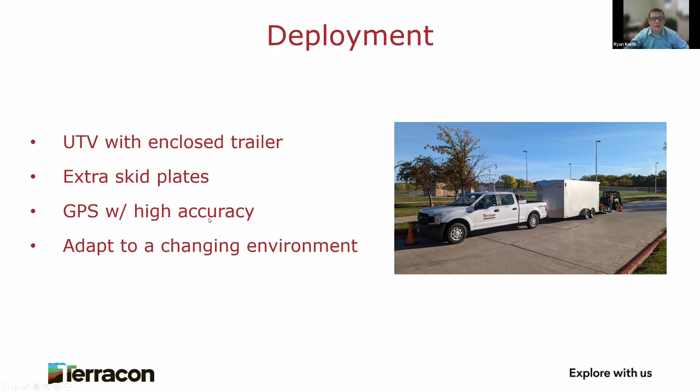And then I would say just adapting to a changing environment. People get tired of driving, people get tired of processing. So right now we have 3 of us that are processing data. This unit's essentially in use constantly, either with travel or collection. So we have a lot of data coming in and a lot of data that people want in short amounts of time. I'm going to go back to the previous one.

So we bought the standard cart that Kontur makes. We decided that this was the best option first, at least, before trying to custom make anything or mount it onto a little van. And we had some issues at first trying to get this thing going. But I would say Kontur's customer support is fantastic. We've spent hours on the phone with Paul just trying to figure out the best way to process the data.

We also had an issue with the GeoScope, which was quickly resolved. We even got a loaner in the meantime while it was getting fixed. So I will say that in general, geophysical equipment companies don't have this kind of customer support that we see with Kontur. We have a ton of gear, from seismographs, radars, electrical resistivity equipment, and getting those worked on when they break can be painful. Sometimes it's 6 months before we get the equipment back without really any communication on what's happening.

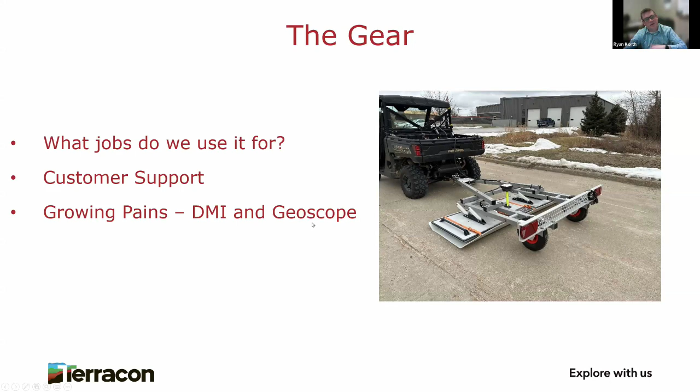So some projects that we've done with this: SUE, we recently did this one. We have a standard internal protocol where we require MC GPR on any SUE project as just the first step, right? Because you can get the big picture fast.

This site here, I think he was there maybe half a day with setup, collection, teardown, where it would take you at least a full day, probably 2, to collect with a standard radar. So we go out, we do this first, find all the utilities that we can, and then we send ground crews in to designate.

A lot of what we've been using the Kontur for is asphalt thickness, both private and public. A lot of them are just worried about thin spots, right? We have an old horn antenna that we used to use for this. It's clunky, it's old, it's hard to use. People don't like it. So we switched to doing Kontur.

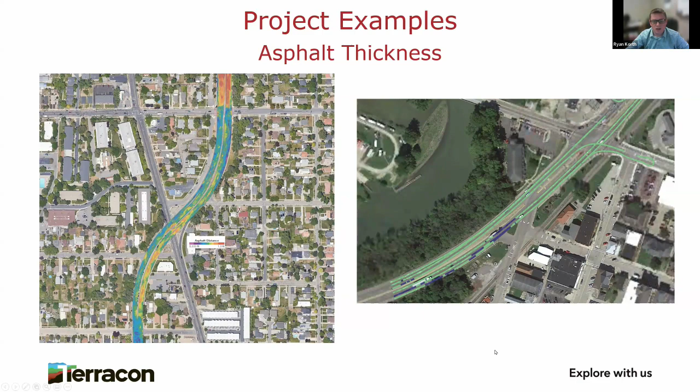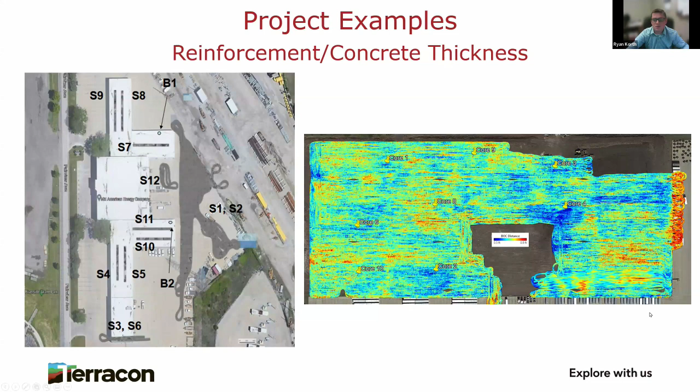Another thing we found that works really good with the Kontur is voids, actually. We've done some state highway work where they have sinkholes, and nobody wants to shut down a state highway or an interstate for that matter. So we go out with rolling traffic control, we just collect, go back. It takes a little longer, but the DOTs are more willing to do that than shut down lanes.

And then lastly, we do a lot of these pre-construction surveys looking for buried debris, landfills. In an urban environment, like downtown, if there's a parking lot there, it wasn't always a parking lot. So before these guys start construction projects, we'll map out where there's debris or tanks, just so they have an idea of what's out there before they start putting shovels in the ground, and they have a contingency plan on what exactly they're going to get into.

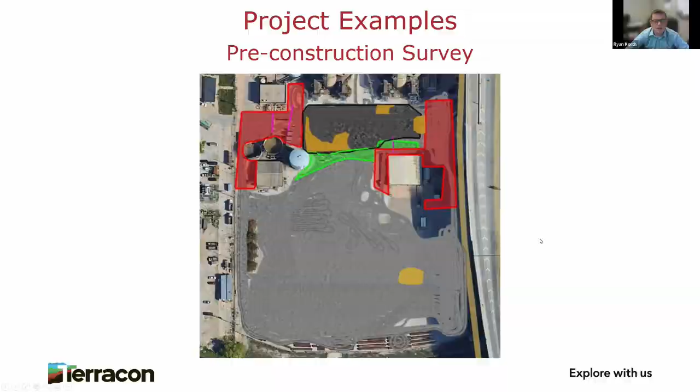I think that's all I have. Decent sized projects, right? Yeah, they're all huge. I think the biggest one we've done is around 50 acres so far, of full coverage. So we really enjoy it. Yeah, whoever's dedicated to collecting your data is doing a great job of coverage. They're really well covered. Normally you see some gaps, but there's not really any.

One of the things I was going to ask you is, does the team collecting the data change the collection settings depending on what they're looking for, or do they keep it the same all the way through? We mostly keep them the same unless we need to go faster. Gotcha. Some of the roadway projects we go faster just to keep up a little more with the flow of traffic, so we'll decrease our sample rate. Gotcha. Because you don't need the high resolution if you're just picking asphalt.

And were you picking asphalt thicknesses before, or is this a new thing that you started doing? You said you had equipment before. I would say it's mostly new. We used to use the horn antenna rarely. We've done some little parking lots with single channel radar, but it's mostly a new line that we're offering to people. That's great. It's been greatly successful. And have you thought about bridges yet, or have you not gone into that?

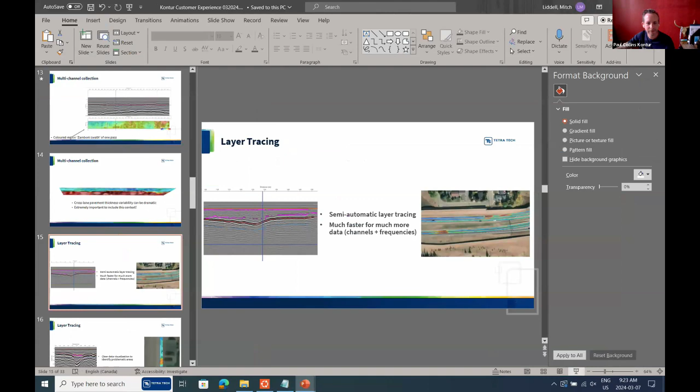Oh. It's poor practice to not be on the title slide. Sorry about that. Anyway. All right, I'm ready whenever, so. Yeah, go for it. You should be able to, yeah, go for it.

Yeah, so it's actually a really nice setup we got for this presentation with Ryan going first. They were using a ground coupled, I guess, a Terracon. So we've had the air coupled system. So the two, I guess, classes of Kontur GPRs we can kind of look at. Our experience. My name is Mitch. We're based in Edmonton, my group, and we're sort of focused on infrastructure primarily with this GPR, that being roadways and bridges and things like that. But one thing I'll talk about in this presentation is one thing we like about the Kontur system is it's pretty versatile. So trying to branch out into a number of different things. And I'll show some examples later on.

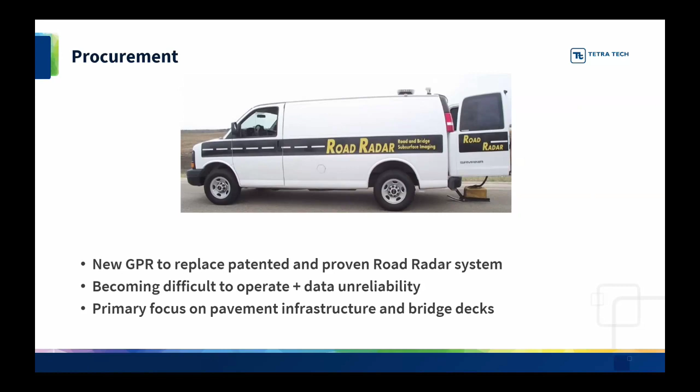So first of all, the procurement process I'll talk a little bit about. We were replacing an older GPR system here, the Road Radar, that was very proven, like we had been using it for decades. But it was getting older and it was a proprietary system, so difficult to operate and difficult to replace parts, things like that. Our primary focus was pavement infrastructure and bridge decks, and we wanted to replace it with a new system that could promise the same reliability, ideally, and the same volume of data that we were collecting, but ideally improve it. So we kind of went through the different options available and eventually focused on the Kontur system.

The multi-channels was a really important thing for us, as well as the traffic speed collection, because traffic control is an enormous headache. If you can avoid it, that saves money and makes everything a lot faster. The software I was personally familiar with because I'd used the ground coupled system previously, so that wasn't much of an issue for us. But the frequencies available was very important. So not every single GPR has the high enough frequencies we need for those very thin layers at the top of the asphalt, which is kind of the bread and butter of our group.

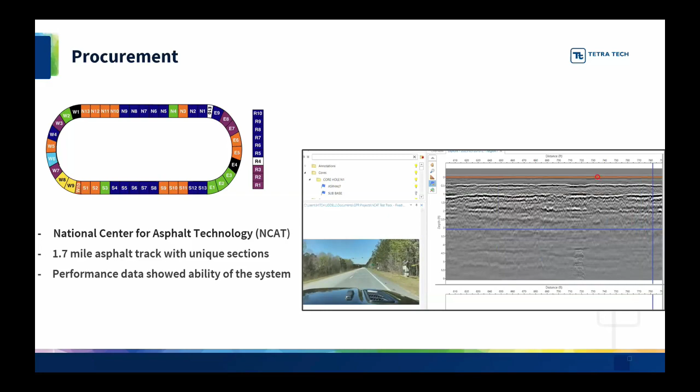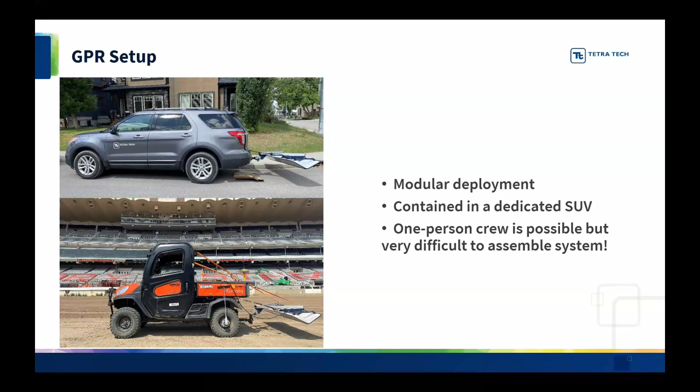It's a dedicated system, nice and contained. It's possible to do it with a one-person crew. I've done this many times where I'm the only person assembling it and collecting with it, but it's very difficult. And it's not ideal. It's one of those things that you can do it with one person in like an hour and a half or an hour or something, or you could do it in 5 minutes with two people. So it's better if you can afford to have a two-person crew.

The setup itself, so all the nice images from Kontur, like the promotional images, they always look really good, as you might expect. But the 2.1 meter wide antenna, which is the one we have, so you can get most of the lane in each swath, is really too big and heavy to just sort of float there off the ground. You need to have the straps attached to it to kind of hold it up. And we found that the stability of the floating bracket there, the V-shaped bracket, is a bit of an issue. My best guess is because it's a European system with a 5 centimeter.

It's expecting a 5 centimeter ball, which is really close to 2 inches, but not exactly 2 inches. So over time, as we've used it more and more, the tightness when you lock it in on that ball is not as tight as it used to be. So we really do rely on these straps, and we're in testing an improvement that hopefully will deploy. Actually, next week I'm going to test it. Where we can make this more stable, because it works all right, but it's not a long-term solution. We need to make it a more stable solution when you're collecting hundreds of kilometers at a time.

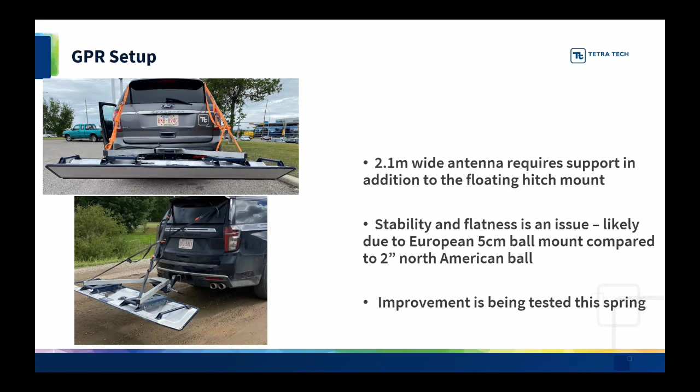And as mentioned previously, the GPS is really important. There is a half decent internal GPS on the system that's used just for timing, but you can use it if you don't have anything else available. So I've done that a few times before, where the precise positioning isn't all that important. If you're just collecting a swath down the road to get an idea of the road and you don't need to know exactly where on the road it was, the internal GPS is fine.

But generally speaking, you do need this external GPS, which is an additional cost. An RTK subscription also comes with that to make it centimeter accurate, or as close as you can get. This makes it possible to get good coverage, like some of that good coverage we saw in the previous presentation. And when you're doing this, a two-person crew really is necessary, just so you can have a driver and a navigator.

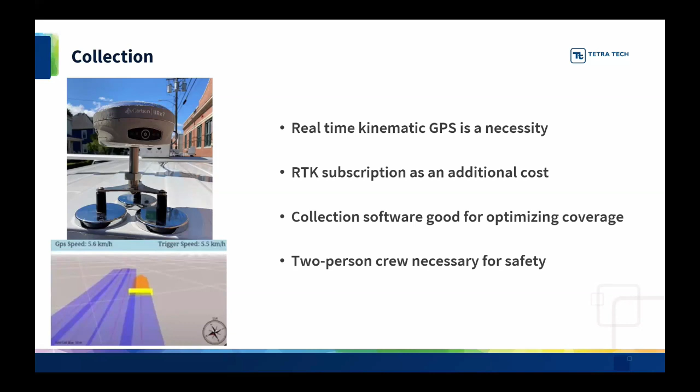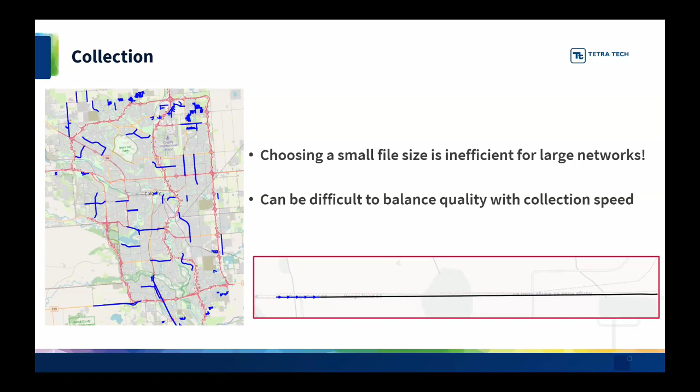And that took me way longer than it needed to. So this is just the learning process where now, after I made this mistake once, I can collect much more efficiently and analyze a lot more efficiently. But these are little things that you don't know until you try them, I guess.

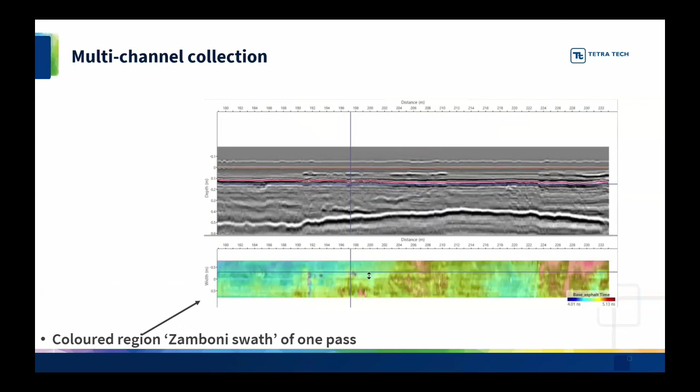So I'll talk a little bit about the analysis of the data. Like I said, our primary focus is pavement and infrastructure. So from my perspective, one of the most important things is this multi-channel collection instead of a single channel, which is the old system we used to use. So I call it the Zamboni swath, this colored path. This is how much of the road we're getting. And you can see as I scroll back and forth across the channels, the road does change in the lane. And it might be important, some of these small little features we're seeing. Depending on the project, they might be important, and you don't want to miss them.

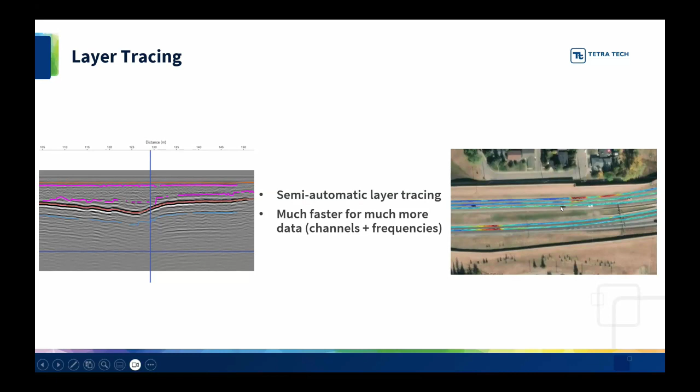Another example here where we've uncovered this extremely interesting, or from my perspective, interesting deeper feature here. You can highlight that as well. And you might miss this if you didn't have fast enough trigger spacing. So this is over, what is that, 4 meters? I've seen plenty of data collected with the older system that was more than 4 meters for collection. So you could skip over this stuff if you don't have dense enough data.

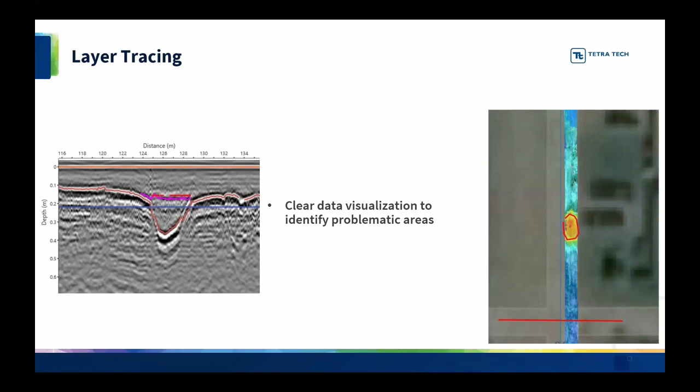It is important to calibrate the depth to the asphalt, and so coring is an important part of our procedure. We find when we're collecting for a large network, there's so many different crews collecting so many different types of data. Sometimes the cores get collected before the GPR, which can be a bit of a headache because they're not always exactly where you want the GPR to be, because the GPR can reveal some interesting features that the cores have now just missed.

It's also really important to have accurate GPS for the cores, because we want to know exactly where in the lane they exist. And sometimes this is all done by relative spacing rather than exactly on the GPS. So this is a best practice thing that we need to sort out perfectly, but it can be difficult practically.

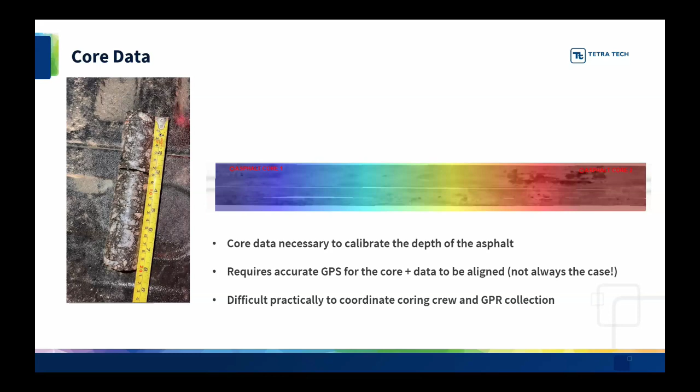One thing I'm trying to test this spring is to change the parameters of the GPR as we're collecting so that we can get an idea of the depth without coring. Probably not to replace coring, but just as an additional thing. Our previous GPR had this ability, and I think the Kontur GPR has the possibility too. I just need to play with it and do some tests. So that's something we're going to be trying to roll out this year. Just by altering the transmitter and receiver antennas to make a common midpoint, you can estimate the depth without using a core.

Obviously, I would also include a lot of filtering when I was actually looking at it, but you're cutting out quite a lot of data when you have to do that as well. So it's an issue, and I can't completely solve it. It's just a matter of rather aggressively removing noise and filtering. But this is an issue for any air-coupled system.

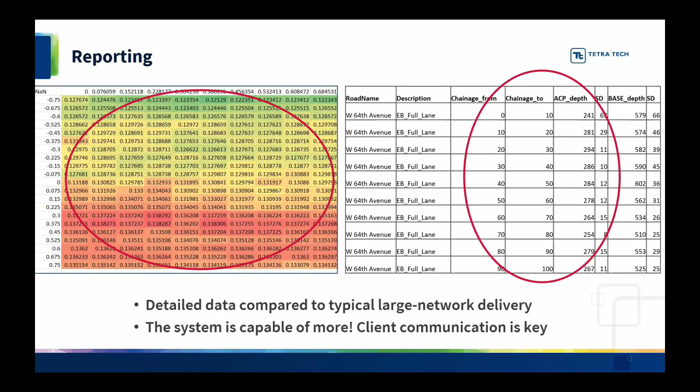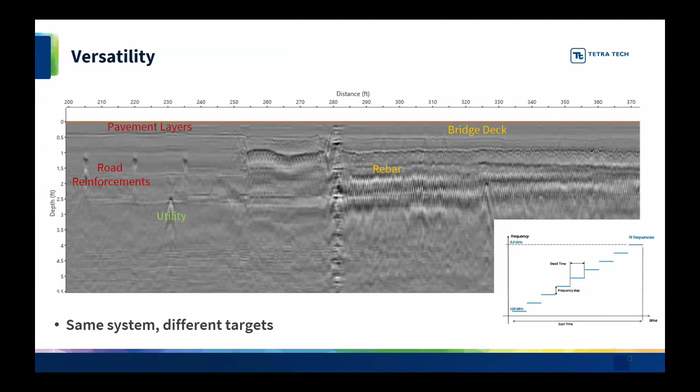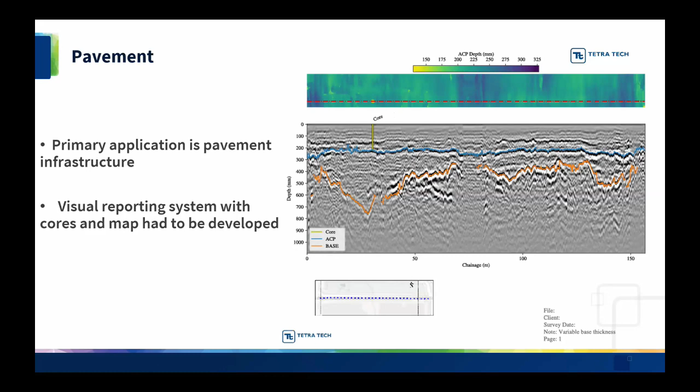And then, like I said, primary application is pavement. We had to develop a visual reporting system because we have to fold the GPR into some of our larger projects, and it's nice to be able to see exactly where we are on the map, including our cores and everything, all in one visual package. Sometimes clients don't want to see the overview of the whole network, but just focus on a small area. So we've developed this.

Bridge decks is another thing that, because of the dense data sampling that's possible with the system, we can take seriously. So there's a few different infrastructure issues with bridges that are really difficult. With our old GPR, it would take a long time to collect the data, so much time that it's probably not worth doing it some of the time, but it's quite easy when you have such dense data sampling.

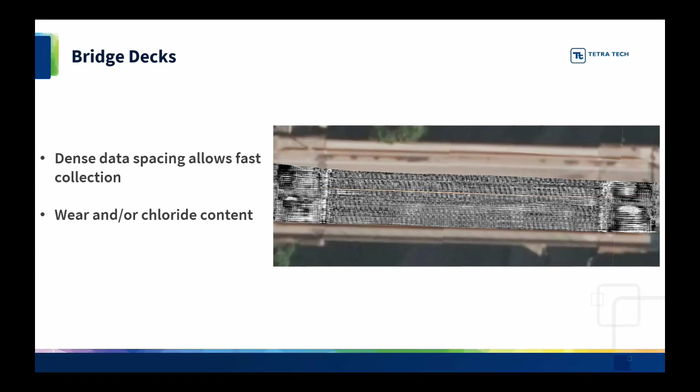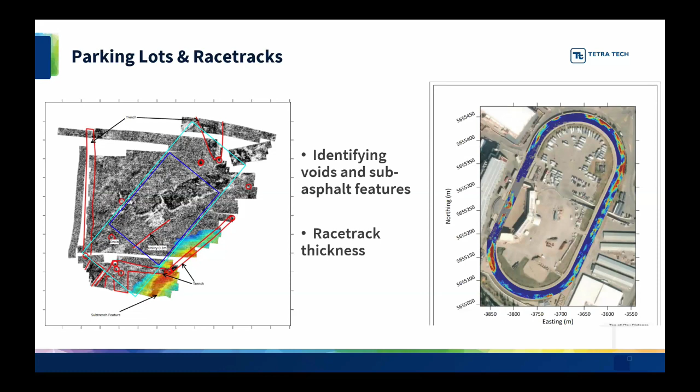And on the right, this is looking at how deep the racetrack was to the base layer beneath it, and where it would be safe, where it needs to be repaired, that sort of thing. Kind of a fun project.

In some municipalities, there are tree roots that affect the infrastructure. So tree roots we were looking at, we can identify them just from context. They're different from pipes because they're going to look a little bit more organic and have slightly different reflection profiles, especially if you can see a pipe nearby. So tree roots, this is another infrastructure project that we've been trying to get into.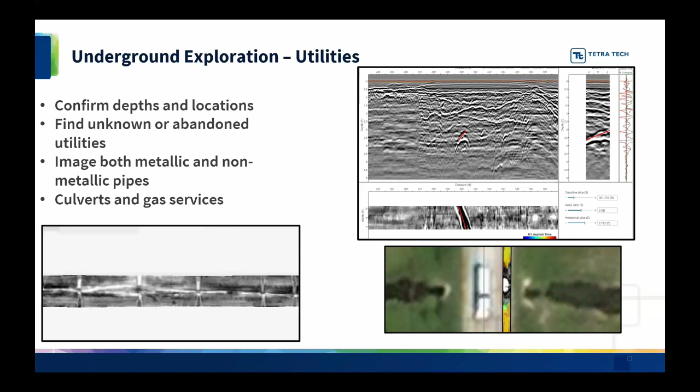And the last thing here, something I'd like to do in Edmonton, we have a lot of work on ice roads way up north. This isn't something that we tested this winter because very inconveniently I had a baby, so I was off most of the winter. But next winter, this is something I think this system will be really useful for, and that's something I'd like to expand into for sure.

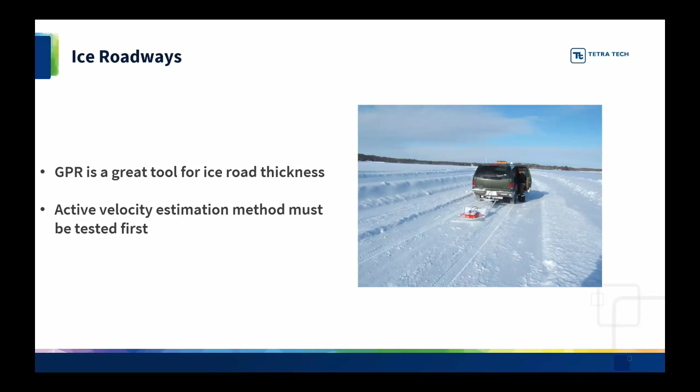So in summary, the multi-channel and step frequency system, that's the broadband frequencies that are available with this system, were really the main things that I was looking for in a system. Its versatility is important, so lots of different applications, not just the pavement application. We get our results a lot quicker. One issue we had was fitting our deliverables with the Kontur into the existing workflow for the old system, so over a few years, we'll be able to make this a lot more efficient internally. But we do get the results out.

The urban EM noise is probably the biggest issue with the air coupled system. We can mitigate it, but we can't remove it entirely. And there's still some room for improvement that we're working on. Hopefully next year, this time will be even faster.